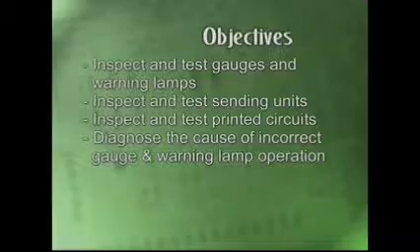After viewing this video, you should be able to inspect and test gauges and warning lamps, inspect and test sending units, inspect and test printed circuits, diagnose the cause of incorrect gauge and warning lamp operation, and inspect and test sensors for electronic gauges.

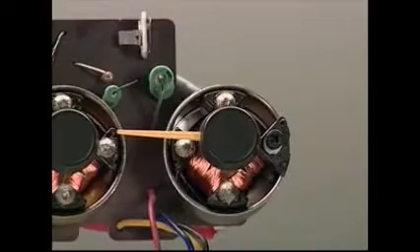There are two types of analog or non-electronic gauges commonly used on passenger vehicles. The first is the magnetic gauge. A magnetic gauge, sometimes called a D'Arsonval gauge, uses a magnetic field to move the needle on the gauge.

In a D'Arsonval gauge, a coil of wire is wrapped around the base of the pointer needle to form an armature. When current flows through the coil of wire, a magnetic field is created in the armature. That field is opposed to a permanent magnet that surrounds the area of the needle. The needle of the gauge moves in response to the strength of the current that flows through the coil. This type of gauge is commonly used as an ammeter on the instrument cluster.

A variation on this type of gauge is the bobbin gauge. A bobbin-type gauge uses a bobbin assembly to create the magnetic field that causes movement of a shaft to which the indicating needle is attached. A common bobbin-type gauge is a temperature or fuel level gauge.

The second type of gauge is a thermal gauge. The thermal gauge is also known as a bimetallic gauge that operates when a controlled current flows through a heating coil. The heat causes the bimetallic strip to bend in proportion to the heat of the current flow and the needle moves. A common type of bimetallic or thermal gauge is the fuel gauge.

Many analog gauges require the use of an instrument voltage regulator to maintain a constant voltage to the gauges under all electrical load conditions. These voltage regulators use a bimetallic arm and heating coil to open or close a set of contacts. While the operating voltage of gauges varies with manufacturer, typically the regulators will limit voltage to up to 10 volts.

When voltage through the regulator exceeds 10 volts, the bimetallic strip expands and opens the contacts. As the strip cools, the contacts are closed and voltage is again allowed to the gauges. The continual opening and closing of the contacts regulates the voltage. Where a separate voltage regulator is not used, the voltage regulator function is built into the gauge.

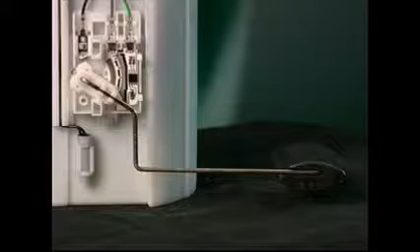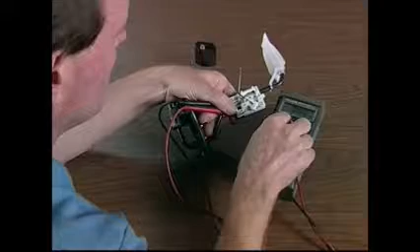In order for a gauge to work, there must be a sending unit. The sending unit provides information to the gauge in the form of a voltage signal. The function of the sending units for the gauges, such as the engine temperature and fuel level gauges, is to vary the voltage signal to the gauge in response to the varying conditions. These types of sending units are appropriately named variable resistors.

A fuel level sending unit alters the voltage to the fuel level gauge in response to the position of a float in the fuel tank. The float is connected to an arm that sweeps across a scale that has a progressive resistance. At one end of the scale, there is very high resistance to current flow. The other end of the sweep scale has a very low resistance.

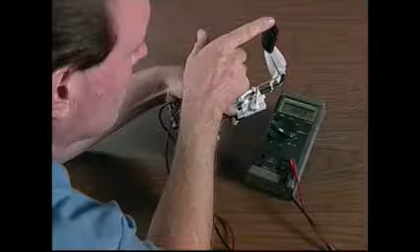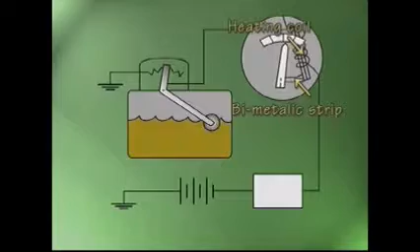As the position of the sweep needle, controlled by the position of the float in the tank, changes, there is more or less resistance to the flow of current through the sending unit to the gauge. The resistance in a fuel level gauge increases as fuel level decreases. The change in resistance as the float drops causes a lower current flow to the gauge. As a result, the magnetic field of a magnetic gauge is reduced, causing the needle to drop. On a thermal gauge, the bimetallic arm is cooled, causing the fuel needle to drop.

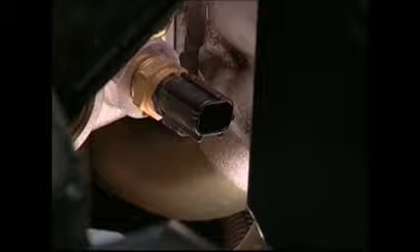The coolant temperature gauges work off of the signal from a sending unit called a thermistor. A thermistor is a sending unit that varies resistance in response to temperature. Thermistors can be either positive coefficient thermistors, meaning that their resistance increases as the coolant temperature increases, or negative coefficient thermistors, meaning that their resistance decreases as temperature increases.

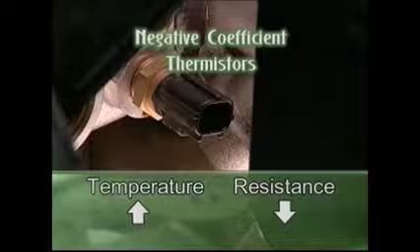The engine temperature gauges are designed to work in conjunction with the type of sending unit used. On a negative coefficient temperature sensor, there is high resistance when the engine is cold. This results in the gauge needle moving very little in response to the decreased current flow through the thermistor. As coolant temperature increases, more current is allowed to flow through the circuit, resulting in a greater movement of the temperature needle.

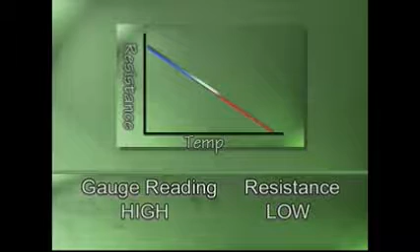Warning lamps are often used either in place of or in addition to gauges on the instrument panel. Warning lamps are either on or off, depending on the condition they're monitoring. Common instrument panel warning lamps include a brake warning lamp, a low fuel lamp, an oil pressure lamp, and a seatbelt warning lamp, among others.

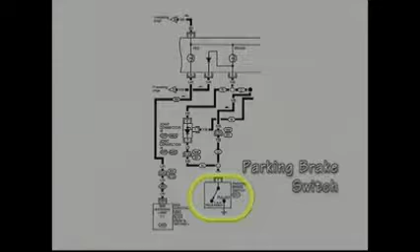In addition to these types of lamps, there are several malfunction indicator lamps that respond to signals from electronic control units that monitor the engine, transmission, and supplemental restraint systems. The lamps that are not electronically activated through control units all use some form of switch to open or close a circuit to ground to turn the lamp on or off.

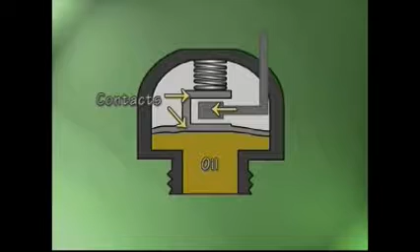A typical example of a normally open switch is the oil pressure switch for the oil pressure warning lamp. The oil pressure sending unit uses a diaphragm that moves up or down in relation to oil pressure. When oil pressure is in the acceptable range, the contacts in the sending unit are separated and the circuit is open. The lamp is not illuminated.

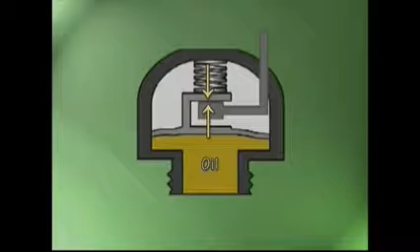When the oil pressure drops below the acceptable level, a set of contacts in the switch are closed and the circuit to ground is completed. The lamp is turned on.

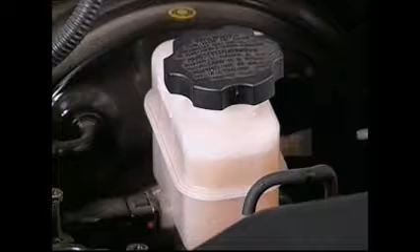Another example of a normally open switch is the brake fluid switch. On this switch, the contacts are normally open and the lamp is off. A float in the brake fluid reservoir will drop with the level of the fluid in the reservoir. When it drops too low, it closes the contacts and the brake warning lamp illuminates.

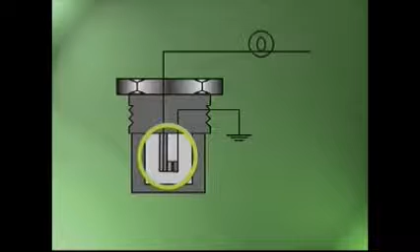Another variation is the coolant temperature sender for a temperature light. On this normally open switch, there is a bimetallic arm that moves as it is heated. When the coolant temperature rises to an unsafe level, the bimetallic strip expands and the switch contacts close, completing the circuit to ground that causes the temperature lamp to light.

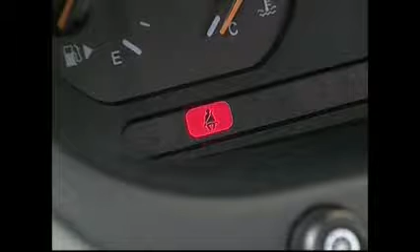A normally closed switch is the seatbelt warning lamp switch. On this type of switch, the warning lamp remains on until the buckle is inserted into the latch. Inserting the buckle separates the switch contacts and the circuit is opened. The lamp goes out as a result.

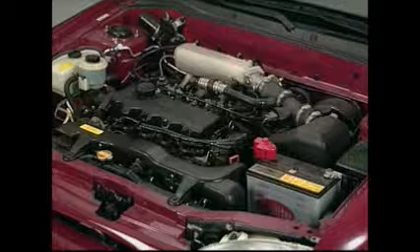With malfunction indicator lamps, the bulb circuit is operated by the electronic control unit to illuminate the lamp. When a problem is detected in a monitored circuit of a system, the control unit closes the circuit for the lamp and the lamp illuminates. Under some circumstances, the electronic control unit will continually open and close the lamp circuit to cause the lamp to flash a warning to the driver.

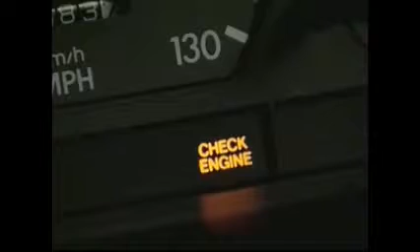As you can see, there are many variations on the types of switches used for warning lamps, but the principles remain the same. When the circuit to ground is completed, the lamps illuminate. And when the circuit to ground is opened, the lamps are extinguished.

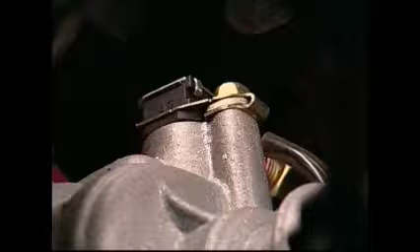Most of the speedometers on today's vehicles are electronic speedometers. An electronic speedometer uses a sensor on the transmission output shaft to generate an analog signal that is sent to the speedometer on the instrument panel. The sensor is known as a vehicle speed sensor.

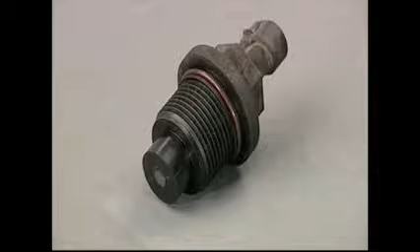The vehicle speed sensor has a magnet in the sensor. A toothed wheel on the transmission output shaft rotates at the same speed as the shaft. A tooth of the wheel is a conductor that passes by the magnet in the sensor. As the conductor passes the magnetic field, a voltage is induced in the wire to the speedometer. When the tooth passes by the magnet, the voltage is no longer generated.

The faster the shaft of the transmission turns, the greater the frequency or cycles per second of the signal from the vehicle speed sensor. An electronic speedometer has a signal converter that changes the analog signal to a digital signal. The result is a speedometer needle that is moved in response to the frequency of the signal from the speed sensor.

Tachometers are used to display the engine speed in revolutions per minute. A tachometer operates in a manner similar to the vehicle speedometer, using a toothed wheel on the engine crankshaft to send a signal to the vehicle's powertrain control module.

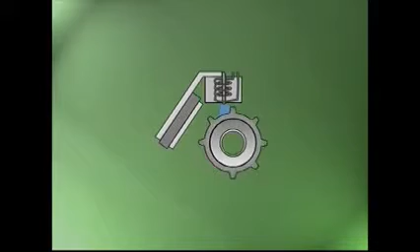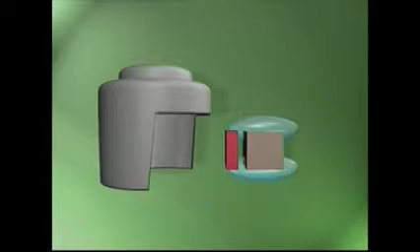The sending unit for the tachometer can either be a magnetic signal generating sensor like the vehicle speed sensor, or a Hall effect sensor that generates a signal when a semiconductor layer is exposed to a magnetic field. Or it can be a photoelectric sensor that generates a voltage signal as light is passed through a cutout in a wheel that is located inside the distributor and rotates with the distributor shaft.

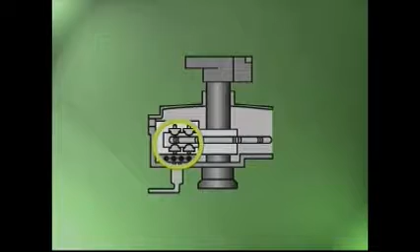The magnetic sensors are called variable reluctance sensors, and the toothed wheel on the crankshaft is called a reluctor armature. The teeth on the reluctor armature are equally spaced around the wheel. There is one tooth missing that indicates the position of the number 1 cylinder piston at top dead center on the compression stroke.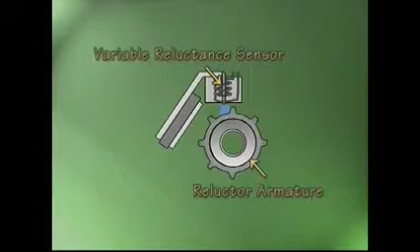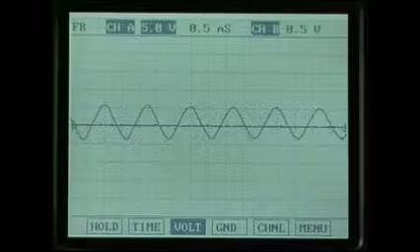The analog signal generated by the crankshaft position sensor is sent to the powertrain control module, also known as a PCM. This signal is converted by the PCM to a digital signal, where it is used as one of the inputs for calculations of fuel and ignition timing. The signal is processed by the PCM, and an output signal is sent to the electronic tachometer, where it is displayed for the driver's information.

Some of the newer vehicles feature a driver's information module. The trip computer display provides the driver with a clock and a display of distance to empty calculations, average vehicle speed, driving time, and an outside temperature.

A mode button on the trip computer is used to cycle through to the desired display to access functions. The distance to empty, or DTE, function uses inputs from the vehicle speed sensor or VSS, tachometer, injector pulse signal, and the fuel level sensor to calculate fuel consumption and provide the driver with the distance that can be driven with the available fuel.

Fail-safe capability is incorporated into the distance to empty function. A vehicle speed sensor, tachometer, or fuel level sensor signal failure will cause the display to be fixed at its present value.

Failure of the injector circuit will cause the trip computer to perform a fixed calculation of the distance to empty. In the event of a fuel injector circuit failure, the trip computer will show a steadily declining distance to empty based on a programmed calculation.

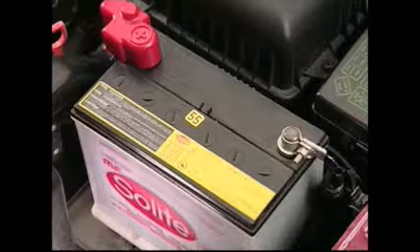The average vehicle speed is computed by taking the driving distance from the vehicle speed sensor signal and dividing it by the driving time. A loss of the VSS signal will cause the display to be held at the current value. The driving time and clock functions are self-contained within the trip computer, and with the exception of battery power, do not require external sensor input.

The ambient temperature function receives input from a temperature sensor located at the front of the vehicle.

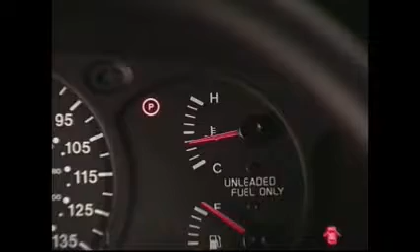Most customer concerns related to gauges will fall into two categories: gauges that don't work and gauges that work improperly. Always begin your diagnosis of a gauge problem by confirming that the condition exists. Then develop a diagnostic strategy to determine the cause of the problem. This strategy should start with a review of the wiring diagram and the system operation found in the repair manual.

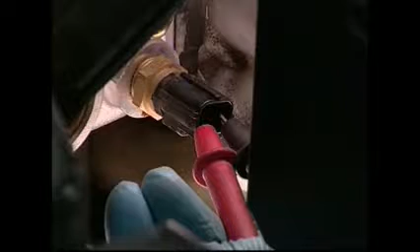An inoperative gauge is usually related to a circuit problem, while a gauge that operates improperly is usually an indication of a problem with a sending unit or excessive resistance in the circuit. Now let's take a look at some examples of how you might approach both types of problems.

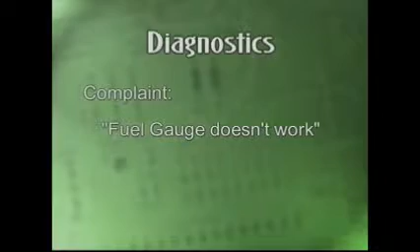The owner of this vehicle complains that the fuel gauge doesn't work. Let's start by confirming the complaint. With the ignition key in the on position, the gauge needle doesn't move. The owner said they just filled the tank with fuel, so we know it has gas in the tank.

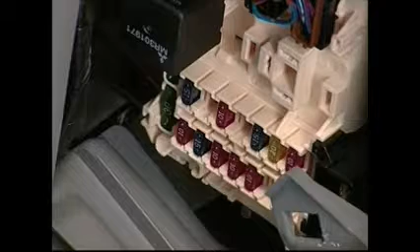So let's continue. The wiring diagram shows that the fuel gauge gets power from the gauge fuse in the fuse panel. That fuse supplies power to all the gauges, and the other gauges work, so we can eliminate that as the cause of the problem.

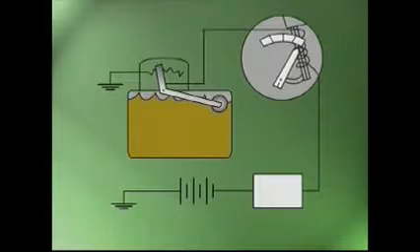We can tell from the wiring diagram and our understanding of sending units that the fuel tank sending unit controls the ground side of the circuit on this vehicle. That means current flows through the gauge to the sending unit and then to ground. The sending unit varies the resistance in the circuit that alters current flow through the gauge and causes the reading on the gauge to change.

We also know that as fuel level decreases, the resistance of the sending unit increases. So if the gauge is reading empty, there must be high resistance in either the sending unit or the circuit to ground. Let's test the sending unit with an ohm meter to see if it's working properly.

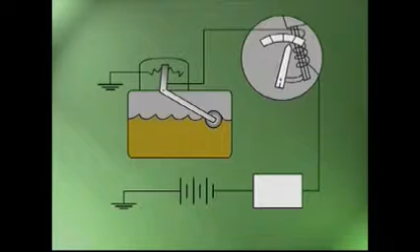On older vehicles, it was possible to use a jumper wire to ground the sending unit lead to the gauge to check the gauge. Because of the gauge design and the interrelation of systems on today's vehicles, this is no longer a valid test, so don't use that approach.

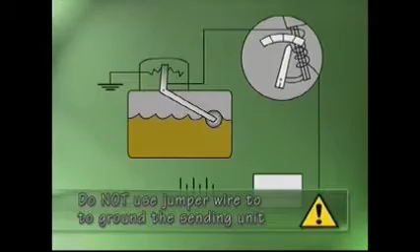To test the sending unit, disconnect the connectors and remove the sending unit from the tank. Then connect a digital multimeter set to the ohms test to the sending unit.

If the sending unit is open-circuited, meaning it always has a high resistance, the meter will display OL for over limits. We have a reading on this sending unit, so let's check it through the entire range of operation by moving the float.

The readings on the meter display decrease as we move the float arm upward. We can see that the sending unit varies resistance through the range of the scale, so it looks like our sending unit is okay.

The wiring diagram shows us that the last point to check is the ground for the sending unit, so let's look at that. We can test the continuity of the ground with the ohm meter. Touch one probe to the terminal end and the other to a chassis ground. There should be a reading of 0 ohms if we have continuity. Our meter shows OL, or over limits, meaning we don't have a complete circuit.

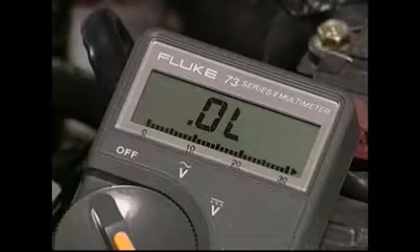No wonder the gauge doesn't work. Let's take a look at another example of a gauge problem, a gauge that is inaccurate.

The owner of this vehicle says that the engine temperature gauge doesn't move more than a quarter of the way up from cold, no matter how long the car is driven. They said the gauge used to go to almost halfway when the engine was warm.

Let's start by checking the car. Just as the owner said, the gauge moves from cold and stops about a quarter of the way. Let's look in the repair manual to see how the system works.

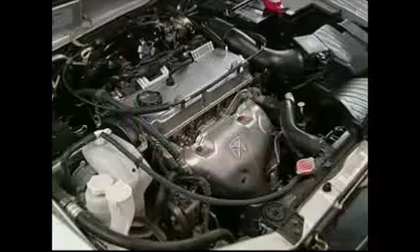The manual says the sending unit for the gauge is a negative coefficient thermistor, which means the resistance of the sensor should drop as the engine warms up. The repair manual also tells us that an engine that doesn't warm up to operating temperature might have a thermostat stuck open, or a cooling fan that is operating all the time.

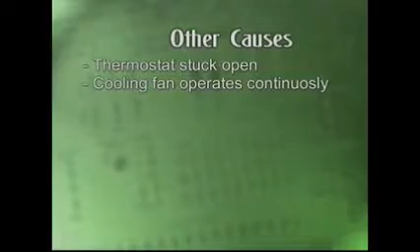Let's check those out while the car is warm. If we feel the upper radiator hose, we can feel coolant flowing through the hose to the radiator. We might have a bad thermostat.

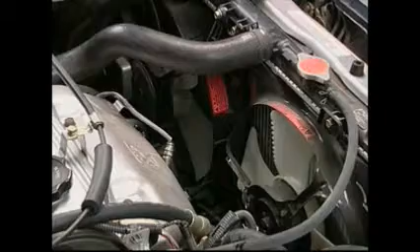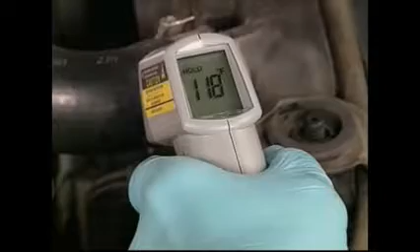We can check the radiator fan visually. The electric fan is off, so that's not the cause. Let's use a digital pyrometer to check the temperature of the coolant returning from the engine through the upper radiator hose. It seems like the temperature is in the normal operating range, so we can eliminate the thermostat as the cause of our problem and go to the gauge circuit.

While we wait for the engine to cool down, let's take a look at the wiring diagram. The circuit for the temperature gauge shows that the gauge gets power from the gauge fuse. Since the gauge works,

we can make sure the power side of the circuit is okay by checking the voltage at the sending unit. On this car, the voltage to the sensor should be battery voltage. Okay, we have nearly 12 volts at the sensor. The problem must be with the sensor or on the ground side of the circuit.

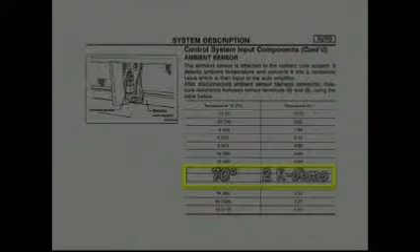Okay, the engine is cooled down, so let's test the sensor. The chart in the repair manual tells us that we should have about 2 kiloohms at 70 degrees engine coolant temperature. Let's use a thermometer to see what the temperature of our coolant is. The thermometer shows 100 degrees, so using the chart, our resistance should be between 1 and 2 kiloohms. Our reading is in that range, so let's check it further.

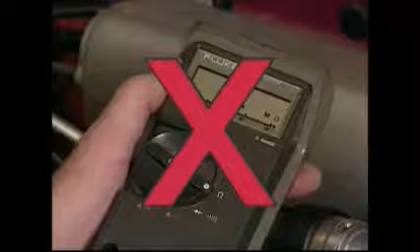Remember that an ohm meter can't be used on a live circuit, so we can't run the engine and watch the resistance change or we'll damage the meter. But we do know Ohm's law, and Ohm's law tells us that as resistance decreases, voltage decreases. And we can use a voltmeter on a live circuit, so let's change the meter to test voltage.

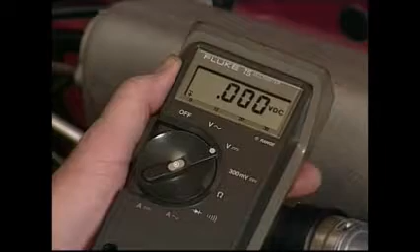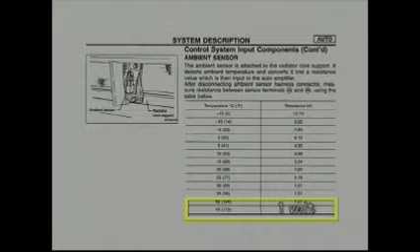Our repair manual tells us that the voltage out of the sensor at our coolant temperature should be about 2 volts, and that the voltage should drop down to about 1 volt when the engine is warm. Let's watch and see. The voltage is dropping. Wait, it stopped at about 1.5 volts, and it's staying there.

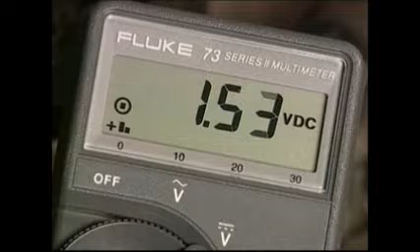Let's see where the gauge is, just where the customer says it stops. Let's change the sensor and see what happens. Looks like the sensor was the cause of our problem.

You can see how, with an understanding of electrical principles, wiring diagrams, and a sound diagnostic strategy, we can narrow down the causes of gauge and lamp problems quickly and easily.

In this video, we've looked at the gauges and warning lamps that provide information to the driver, how they work, and how to troubleshoot problems when they do occur. Thanks for watching.